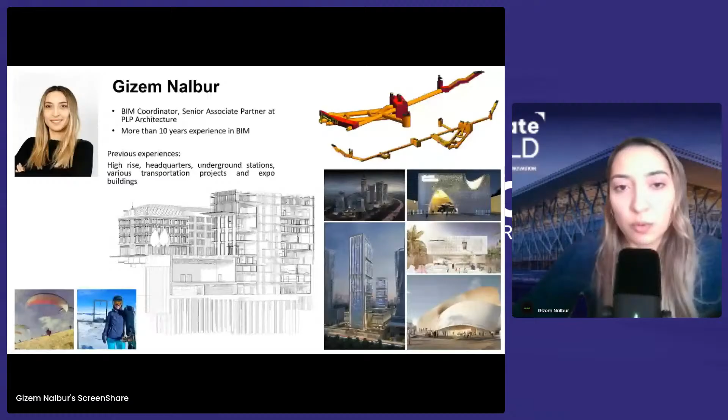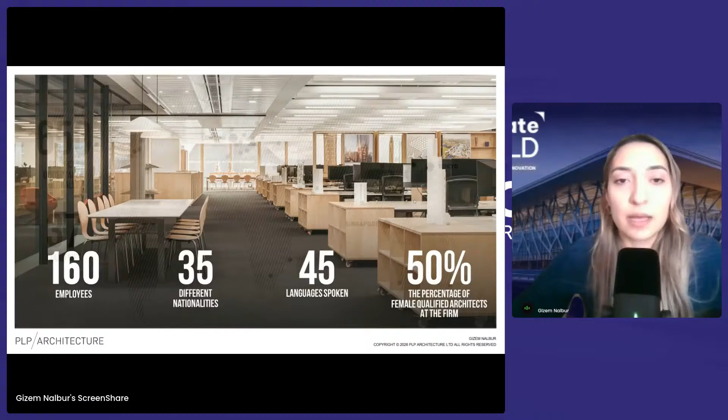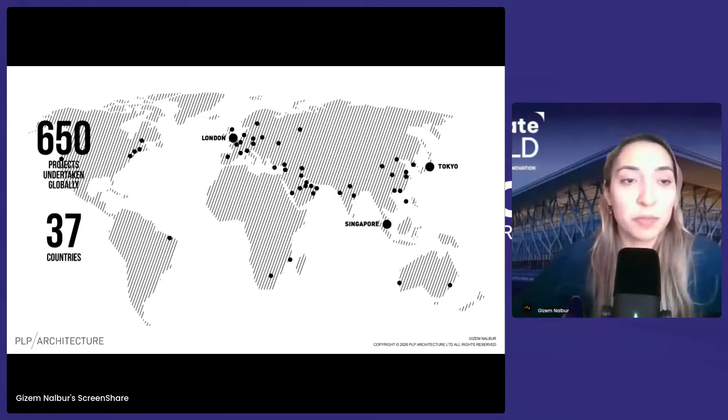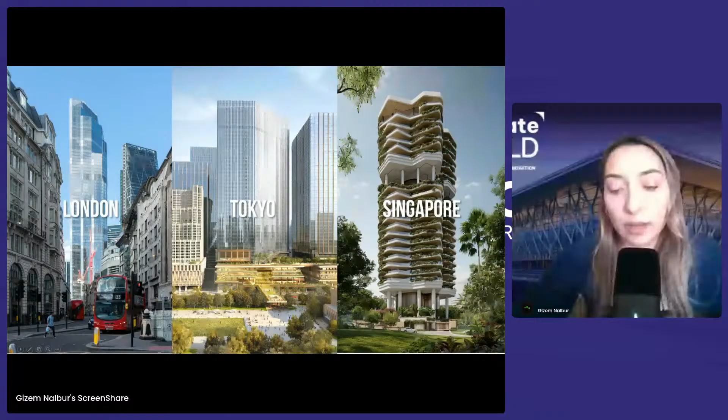So if we look at what we are doing in PLP and who we are, we have 160 employees and our main office is in London, but we also have two satellite offices, one in Tokyo and one in Singapore. You can see the projects we've had globally on the world map here. We've done about 650 projects globally, and as mentioned, we have three offices around the world. You can see 22 Bishopsgate, which I quite like, in the middle of central London, and some of the clients we work with here.

We are an architectural company, but we also have PLP Labs, which does research and strategy. As an architecture company, we do urban design, architecture, interior product design, and sustainability.

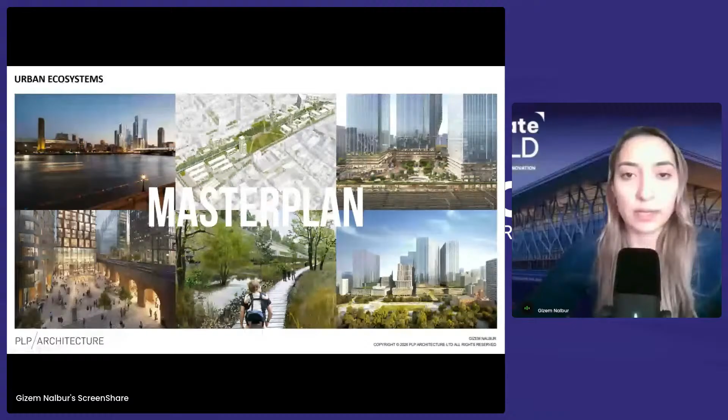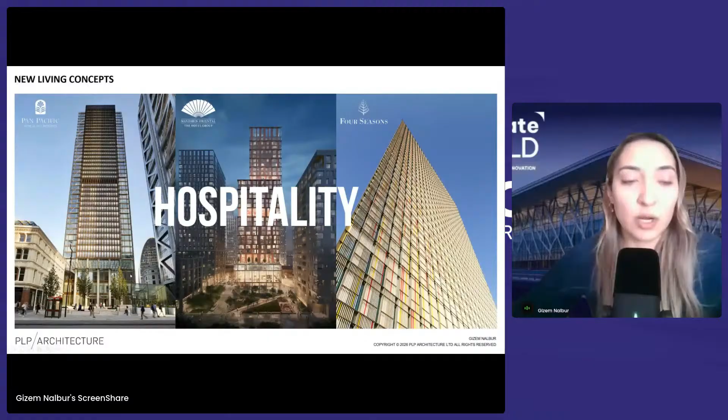We also do residential projects and hospitality. This is 150 Bishopsgate - again, I quite like this building, especially when you come out from Liverpool Street station in central London. I think it looks impressive, to be honest.

Again, some of the brands and clients we work with, and some of the restaurants we work with. We also care about sustainability a lot, and thanks to London Build magazine, we were the most sustainable design studio in 2024.

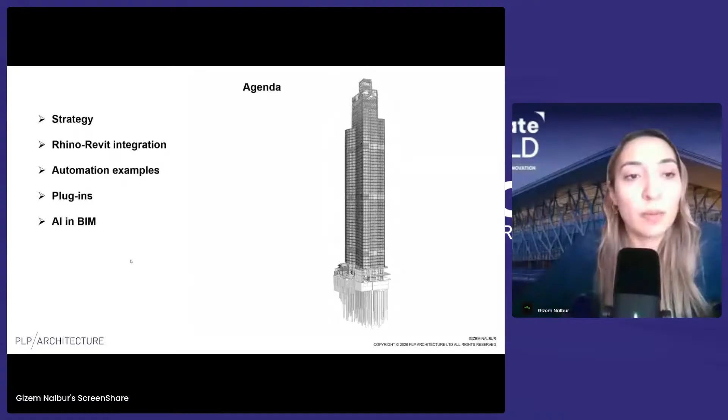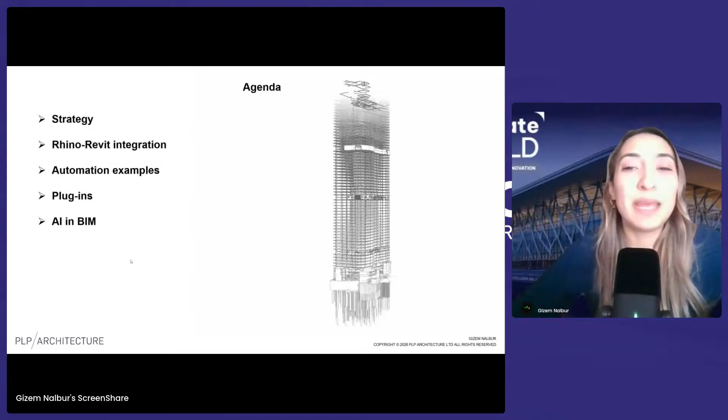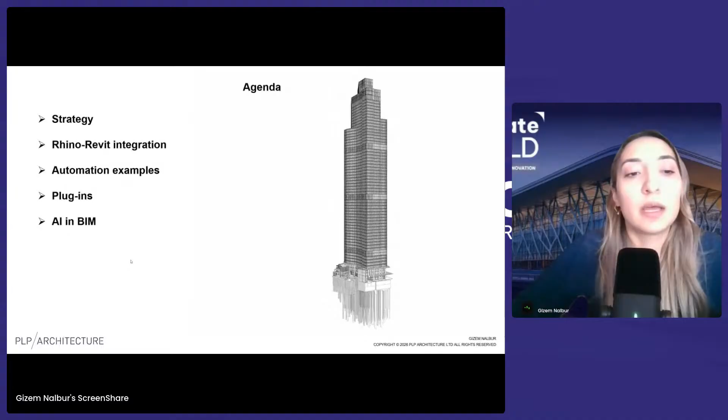So we talked about PLP, and diving into the presentation, let's look at the agenda. We'll talk about our general digital strategy in PLP, how we integrate Rhino and Revit, and look at some automation examples, and why automation is so important for us. We'll look at some plugins - the plugins we create in-house or third-party plugins we use, mainly for Revit. We'll also talk about AI in BIM - two or three important topics about AI and how we implement AI in BIM and technology at PLP. So let's start our presentation.

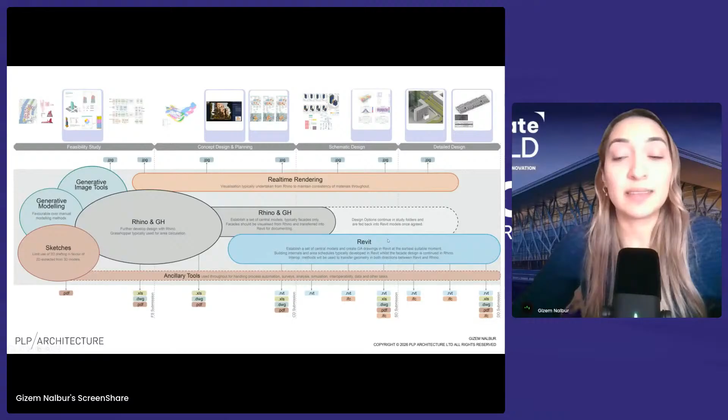At the end of the planning stage, in the schematic design stage, we still use some Rhino and Grasshopper, and sometimes we use them in the middle of the detailed design stage too. It depends on whether we need to create various facade options. You can create geometries a bit more freely in Rhino, and you can also create lots of parametric and generative models there. So sometimes we might need to continue using Rhino and Revit at the same time until the middle or maybe the end of detailed design.

So if you look at how we convert geometry from Rhino to Revit or Revit to Rhino, first let's start with Rhino to Revit. We use four different methods mainly, and the first one is very basic: you can export a DWG file from Rhino and link it into Revit. This can be 2D or 3D Rhino geometry, and this is very quick referencing.

You don't need to educate people about how to script, or spend time on it. Just export DWG and put it in, but there is no BIM data—just geometry, solids, or lines as 2D. But it depends what you need. This can also be very useful to define the facade boundaries when you start using Revit in the beginning.

The second method is a BEAM plugin, which is very useful for us—we quite like using this plugin. This converts Rhino geometry into Revit families. If you have blocks in Rhino, it converts them as families, so every block comes as one family. If you have 10 of the same blocks in Rhino, it places these as the same family into Revit, so you have one family and 10 instances in your Revit project, which is very good.

The other way, from Revit to Rhino, is basically the same thing: you can use CAD export, export as DWG and put it in Rhino, use the BEAM plugin, or create a script with Grasshopper. And this isn't only for converting geometry.

In our office, we also matched all the libraries for Revit and Rhino, so we have the same libraries in both Revit and Rhino formats, but these don't have exactly the same geometry, so we don't convert these from Revit to Rhino or Rhino to Revit.

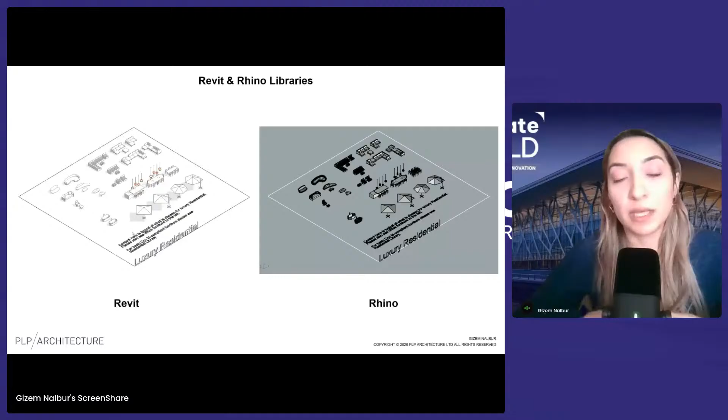We can do some things, but since we use Rhino more for taking renders and for visual and design purposes, we use more detailed furniture in there. But in Revit, we use more simplified, low polygon furniture, which looks better on the drawing. We create this generally from scratch. This is just one bit from our library—I'm not allowed to show everything about our workflow, but I wanted to give an example. You can see the same library in Rhino and the same library in Revit. Again, same principle: in Revit, things are low polygon and more useful for drawing purposes, while the other is more visual. We have the same libraries, but that's not our main aim.

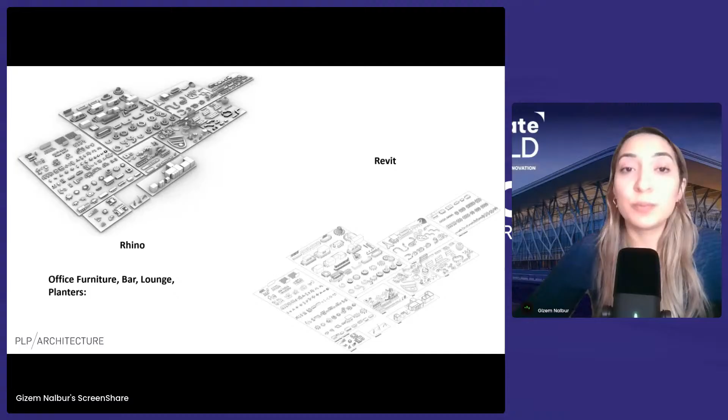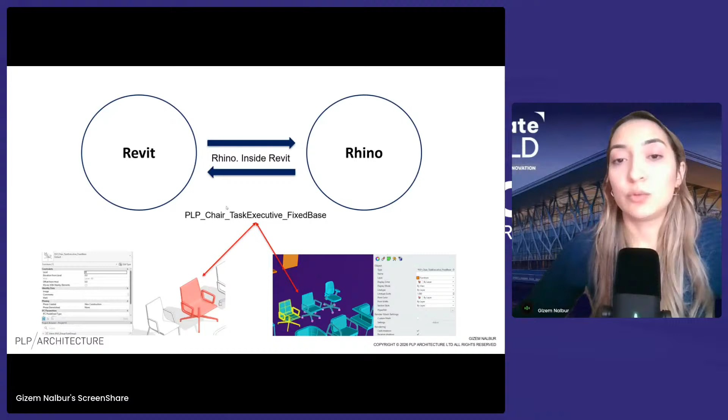Our aim is to swap these when we need to jump from Rhino to Revit or Revit to Rhino. So what we did was create these libraries but matched the family origin with the block origin in Rhino. This is a block in Rhino, and it shares the same origin with this one. This has more detail for visual purposes and has material, for example, while this one doesn't have that detail. They share the same name. So using the same origin and the same name, when we need to swap these elements from Revit to Rhino or Rhino to Revit, it's very easy for us because we already have scripts we created, and we use these scripts to convert each other.

We'll look at one example project about this now, which I quickly mentioned earlier while showing some general examples of our work. This is the Net Zero Korean National Meteorological Center in Korea. We won the competition with this design, and I quite like it actually. If you look here, it looks like a box in a box. Because this is a very sustainable building, we needed to create a secondary environment in here.

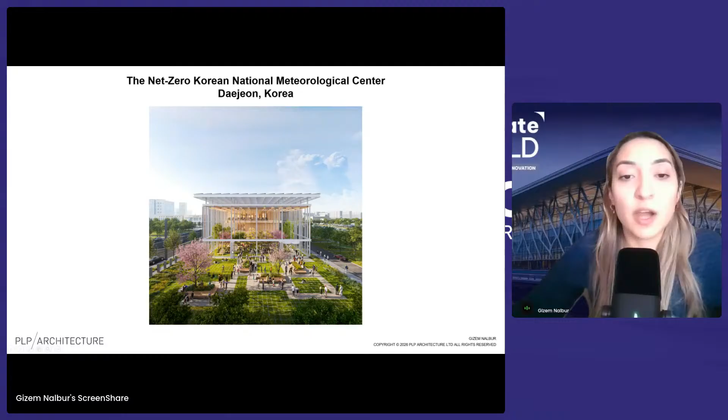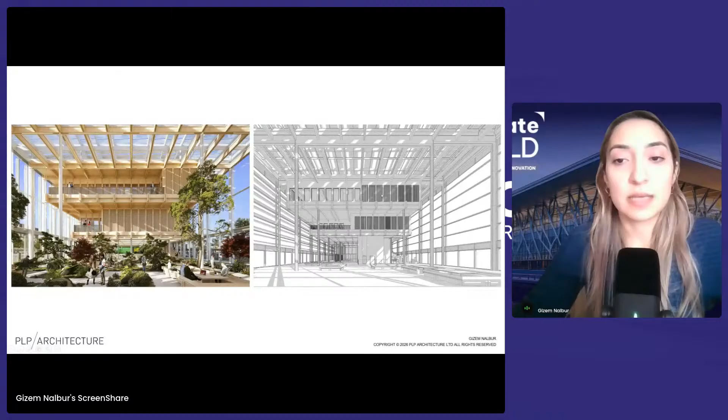Another render. What we did in this project—we started modeling with Rhino, and we did all the Rhino modeling for the competition design. After winning the competition and starting schematic design, we converted this geometry into Revit. So this is a render taken from Rhino, and this is how it looks in Revit. Of course, when we moved to schematic design, we needed to change and edit some bits, so there are some differences between them, but it's basically the same.

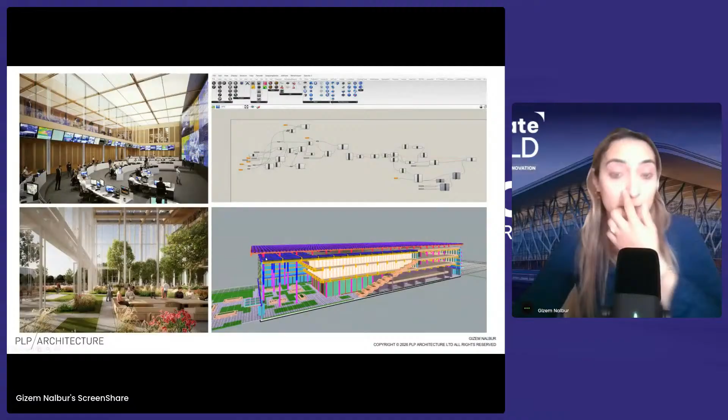So what did we do? This is the Rhino model, which you see on the bottom right. We mainly converted the roof, facade, and structure from Rhino to Revit, because we modeled these very precisely in Rhino, so why wouldn't we do that? We took the boundary for the curtain walls and created these curtain wall types in Revit. For the fins, we created fin families and then placed them using these positions. For the structural bits, we converted from here because it was CLT—we created some families and put these into Revit using Grasshopper scripts.

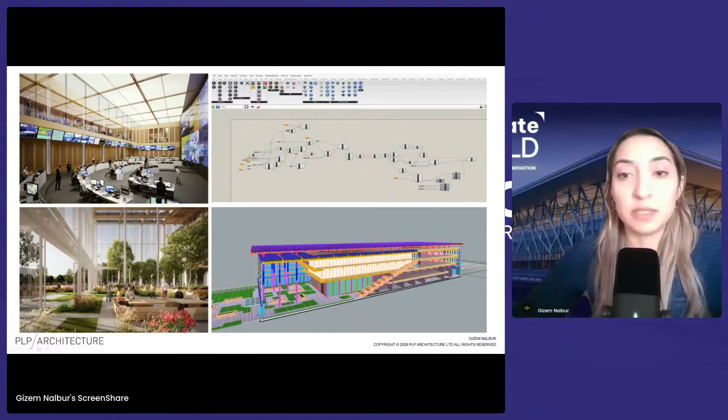So we mainly took the outer structure and structural bits in here. For these bits, for example the seating outside, these are very bespoke, so it's not like furniture from our library—we used a BIM plugin to convert these as a family into Revit. Then we worked on the internal layout in Revit in more detail, changing some bits and doing revisions. This is our Revit model, as you can see, with the bits I mentioned. We prepared all the drawings from Revit for this project.

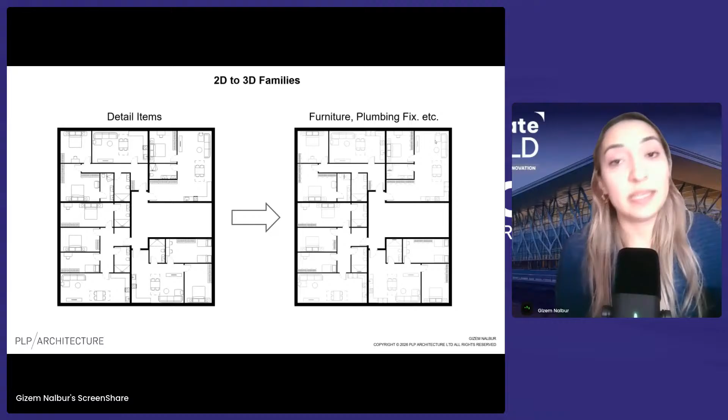So we're diving into different automation examples now. I think this is a bit similar to the other one, but it's totally about integration of 2D and 3D families into Revit. We sometimes design very huge buildings and lots of skyscrapers. In one project maybe we have 90 floors, in another we have 50 floors. If you put 3D furniture in Revit for design options across all the floors, it makes the model very heavy, even though we separate the fit-out models—it still becomes very heavy.

So we found a different solution, and we created detail item versions of these 3D elements. In the very early stage, like concept design and planning stage, we start working with these 2D detail items, and we can copy these and try different options.

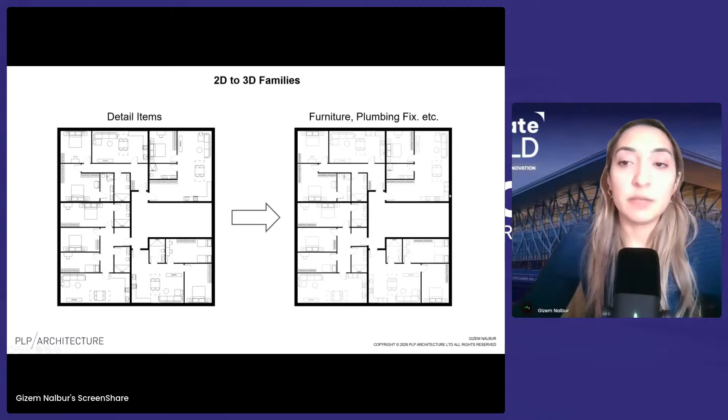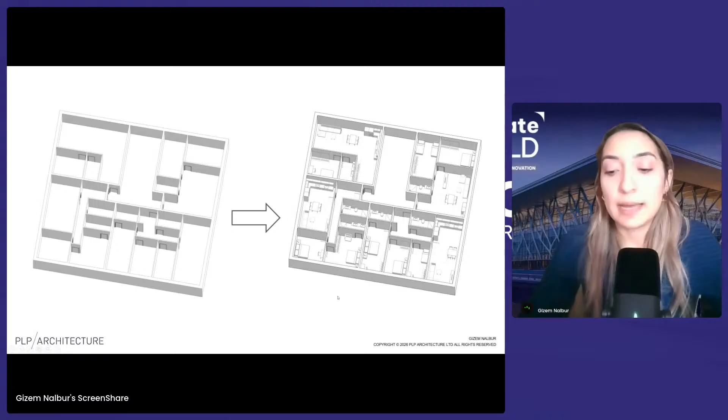When the client picks one of the 3 options we created, we use a Dynamo script to convert these to 3D objects. This is the detail item version. Since it's 2D per view, you won't see it in 3D, which keeps the model very light. Once we decide which option to continue with, we convert these to 3D and we're ready to go. If we do any revision, we can just continue working in 3D.

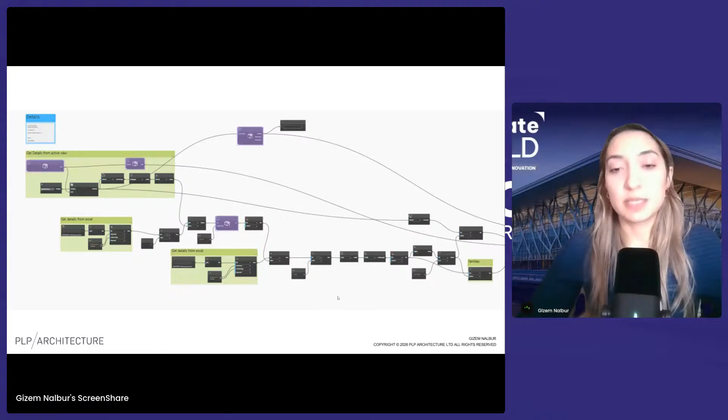This is the Dynamo script we created for this. Dynamo is a visual programming tool, similar to how Grasshopper is for Rhino, but Dynamo is for Revit. You can create scripts without doing actual coding, just using nodes, and if you know how to use these tools, you can manipulate models or any drawing in Revit easily using Dynamo.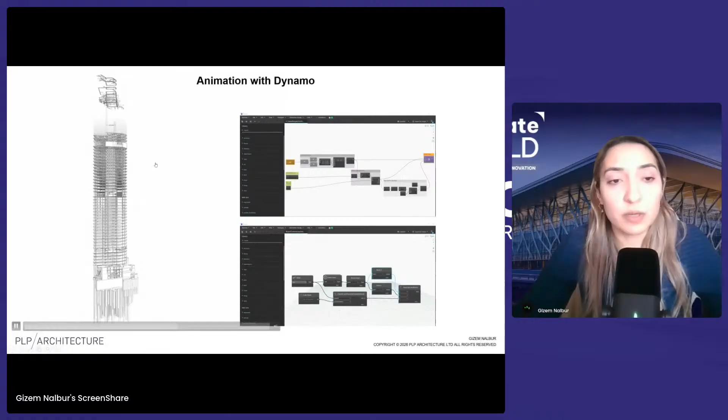We basically created lots of cameras around 360 degrees of the building, and we did this for 3 different models, all with scripts, so we didn't do anything manually. We wrote the script once in one day, and then we can use it for every project.

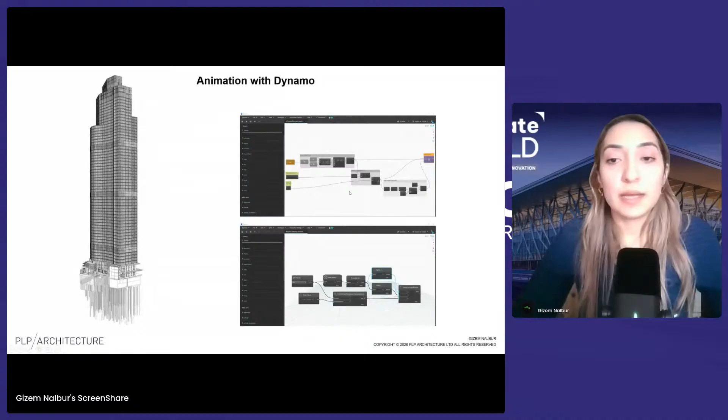We created lots of images to make this animation, and of course it takes so long to export these images from Revit. So we just run these while leaving the office, and it runs overnight. When we come to the office the next day, all the images are exported for one model, or if you run these from 3 different PCs, you have all of them at the end.

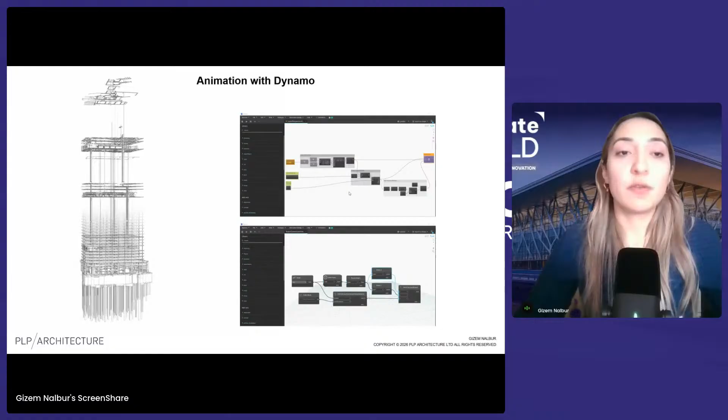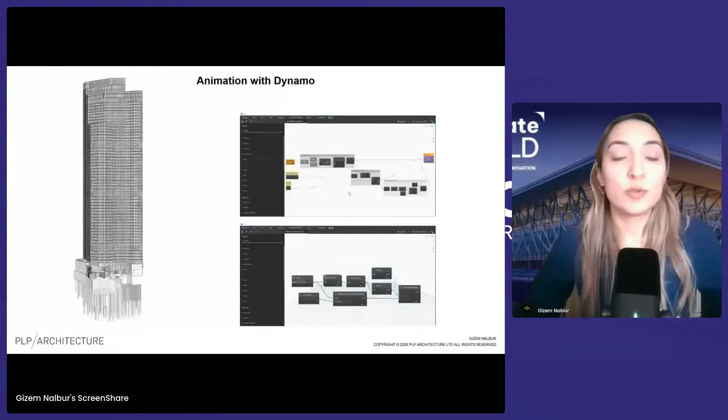Why I wanted to mention this is because clients really like to see these kinds of things. Yes, we have big models, we model everything in Revit, but it's really hard to understand for a person who doesn't know how to use that software or read these kinds of drawings or 3D views. If you animate these buildings like that, it will be much easier for your clients to read, and it will look better than just showing the Revit screen.

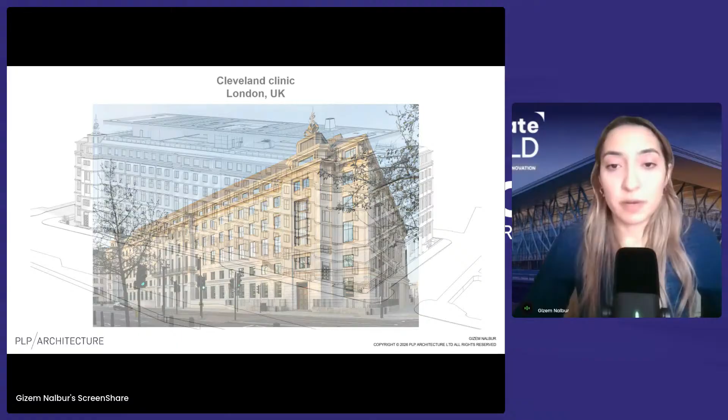Another example project, this is Cleveland Clinic in London. It's a very big building, I must say. While doing this project, we created lots of Dynamo scripts because sometimes we needed to do revisions for lots of bits. Since this is a clinic, we needed to create lots of different furniture and specific things, and for these kinds of big buildings, we really quite like doing automation.

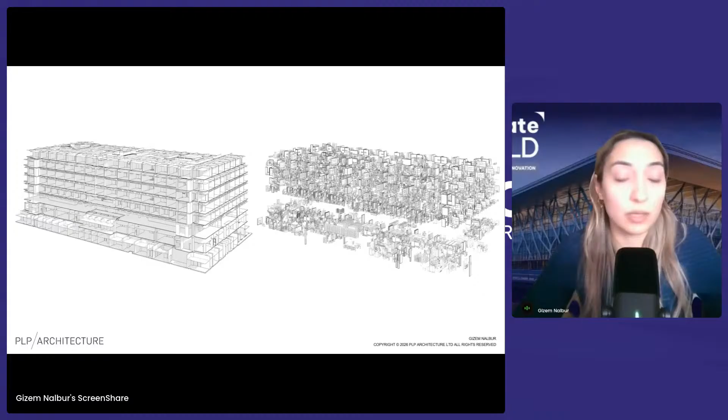What we are trying to do with automation is make architects' lives easier while working in Revit, because if you do everything manually, it can take so long to do some basic things in Revit.

I want to continue with another example of automation in our office. This is a fire strategy example. So what can we do? If you define the right fire ratings for the walls or doors in your project in Revit, we can script this, as we have here in Dynamo, and create these fire strategy drawings automatically with the color code you define.

This is very useful because if you have a very tall building, as I mentioned before, sometimes you think it's a skyscraper with lots of typical floors, but sometimes not, because clients ask for lots of different functions, like mixed use. Sometimes we do a skyscraper where some bits are retail, some are residential, some are hotel, and that makes all the plan views and layouts very different.

So then you need to create these strategy drawings for all the levels. If you use this kind of script, it creates all the drawings for you and makes your life much easier. We use these for every project. We have a Dynamo library in our office, and sometimes we just need to adapt or pick some different properties in the projects, but generally it's very easy to use.

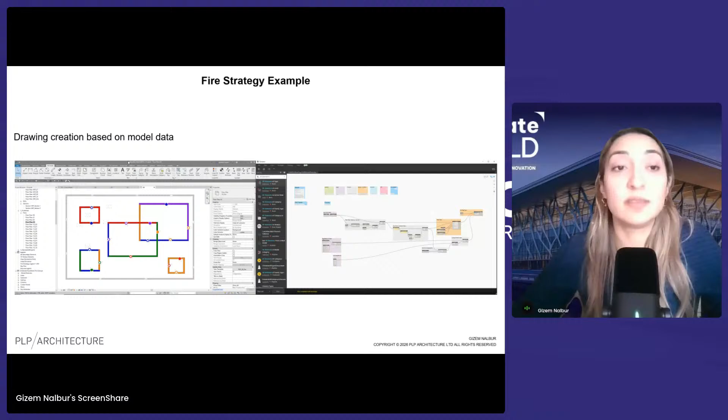But of course, this requires time to understand the requirements from the architects in your office. So another example is the plantation example - plantation is not very good in Revit in 3D, I must say. Sometimes some of you use landscape assets, but it looks good on the renders while it doesn't look good on the drawings, because it shows like a bubble only, with lots of vertex and points, etc. So what we do in 3D, we use very basic low polygon plants just to show in the diagrams, etc.

But we have a 2D plantation library in Revit, and we use these 2D families, detail items on our views and sheets. And we have some Dynamo scripts, and we can arrange the transparency, randomize colors and saturations and more.

So it looks much better and much more like a presentation style in the drawings. I quite like this one because you put tons of trees, and when you click a button, it makes it look much more different than before, and everyone is very impressed. But it is basically very easy to create a script in Dynamo, so it's very satisfying to do these kind of things.

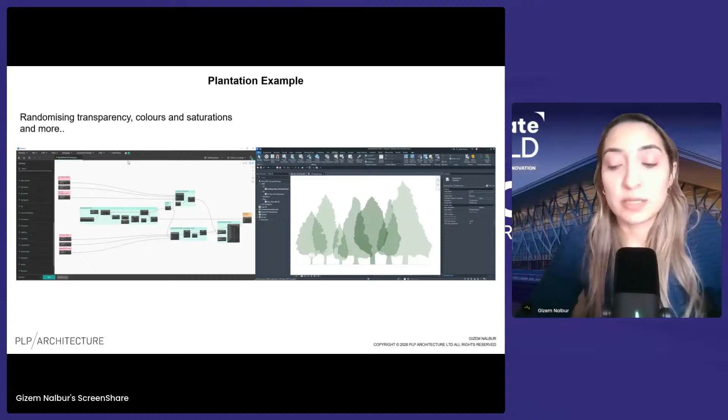We will look at another project example, which is WLA Artificial Intelligence Lab in Shanghai, China. While we are talking AI, I am also proud of that - we also designed an AI lab building, and I quite like this building too. And I really respect Chinese working style - they do everything very quickly, and they are very dedicated to work. So all the design and construction was completed in 3 years.

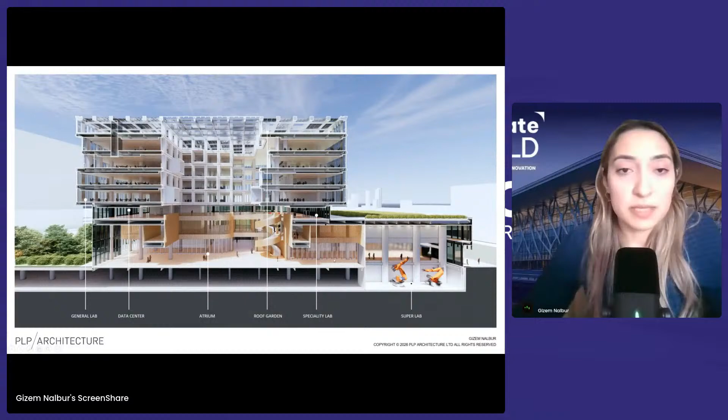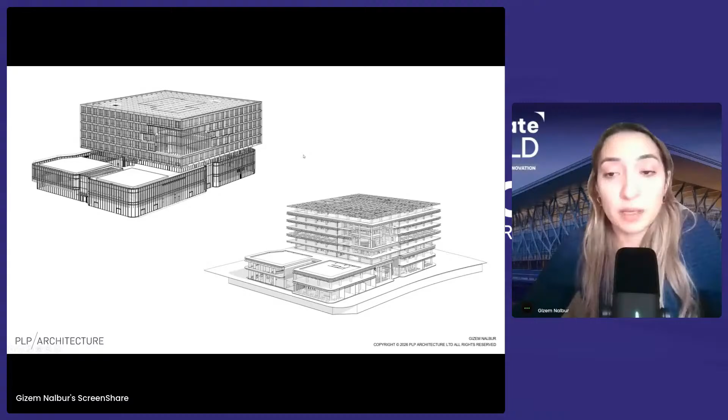And of course, we modeled everything in Revit again. We converted these roof bits and some of the facades by creating families and using some Grasshopper scripts from Rhino, and we modeled some of the bits manually. But again, for these kind of big projects, it is very useful to automate some manual and boring things.

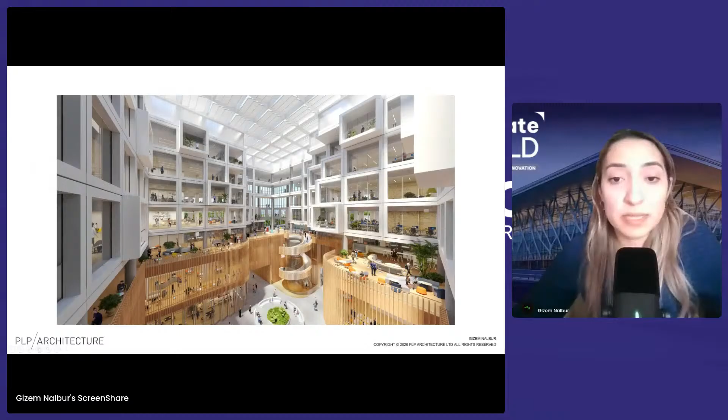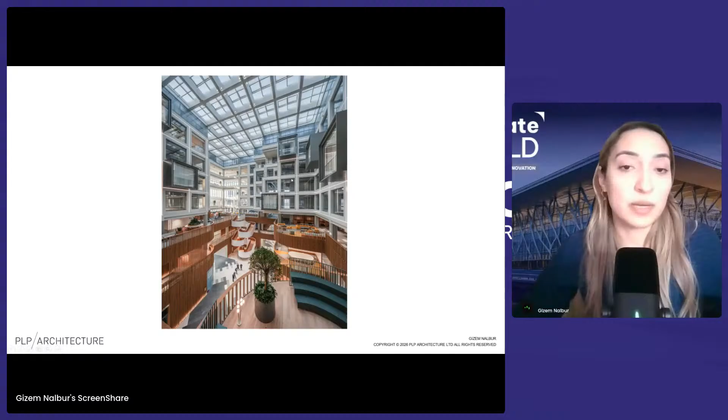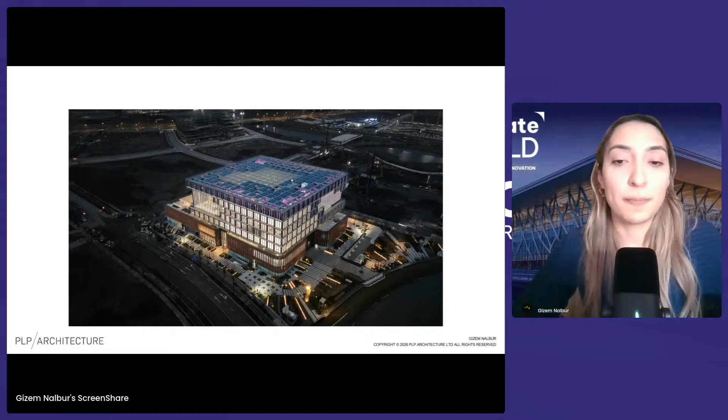And this is a render from inside that we created. And this is a real photo, which is currently like that. Of course, we had to do some revisions for the stairs, etc. But I'm really impressed about the construction system in China, I must say that. And this is a real photo from the night, and we enhanced the saturation and the lights, by the way.

So we will continue with the plugins that we use. Again, we quite like automation - I think you must have understood from the presentation so far. I'm personally very into automation, and we also use Python, and we created our own PLP plugin, which you can create with PyRevit easily by watching some tutorials, by the way.

But we quite like creating some complex things. I cannot show everything in here to you, but I selected some of them, and I had to crop these a bit to show you.

So we have a model issue tool - I think it is very useful. While we are sending our models to the consultants or clients, we don't want to send our models with lots of work in progress and messy views. And we don't want to delete these views and schedules manually.

So we also want to clean some things, like if we have any linked CAD file, or if we have lots of unused view templates, etc. So with this button, basically our architects, project architects, just come here and select which model they want to issue and select where they want to save this file, and the script does everything for them.

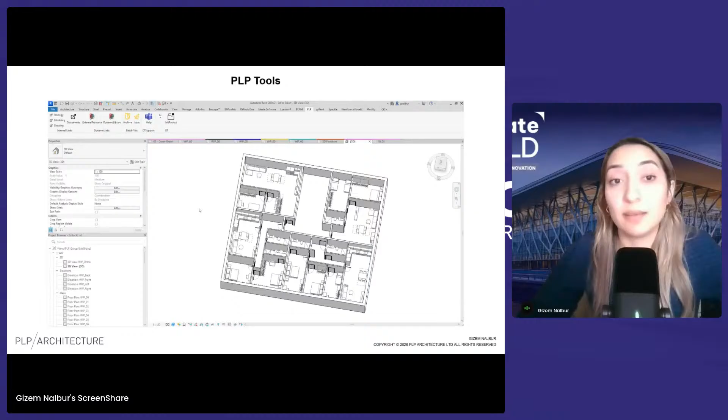So I quite like using these kind of tools and creating these also. So this is not only for Revit - we also have PLP tools for Rhino.

Again, we create these with Python scripts. Like if we want to import layer or change some of the layers for the block objects, or copy layer name, hide, isolate, lots of other things, we have some commands for that.

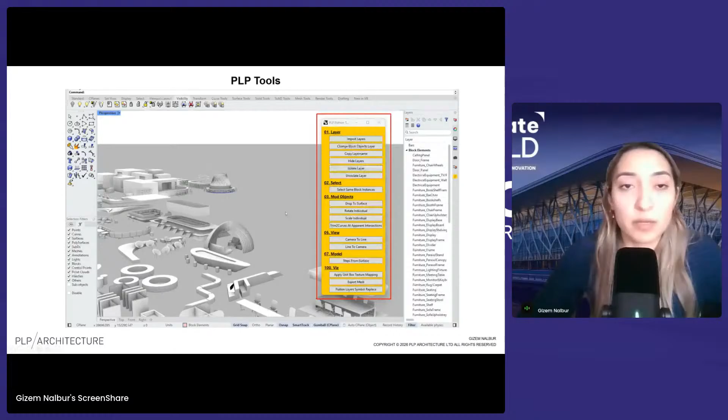I quite like this one, drop to surface. Sometimes the elements, objects are floating around in Rhino, and you just want to align them and stick some of the elements on one of the surfaces. You just need to select the surface and the elements, and it will drop them with this. So I really like these tools too.

So let's look at the other things. Of course, we create some plugins, but sometimes third-party plugins are more reliable because they also give you customer service, and you don't have to handle all the issues that you come across on the way, and you don't have to spend lots of time with scripting, etc. Because of that, we use some third-party plugins too.

Let's look at them. First one is Ideate software and apps, and Ideate Automation. I quite like using these, and I will mention a bit more. And Rhino.Inside, I already mentioned how we use it, when we use it, and BIM again. And PyRevit, we use in Revit and also to create our Revit commands using Python.

And Revit Lookup, I quite like it actually. If you are playing with the Revit API, you need access to some libraries. This is very good - you can select the object in Revit, and if you go to Lookup, it will tell you where to find it with the Revit API.

And interactive Python shell, I will mention this in the AI bit a bit more. I quite like using this too while testing something, especially with Python scripts. And the DiRootsOne ProSheets - most of you probably already know that to export PDFs and DWGs, it is useful. So I would like to look at the Ideate software a bit.

So I can talk about Ideate automation, Ideate software a lot, but I want to keep it short. Ideate automation is another plugin, but it's standalone, and you can create tasks in here and schedule them overnight. There are model health checks, and you can change these properties, whatever you want to see.

So what we do is schedule these tasks overnight, and instead of opening and checking every model manually, we run these at night, because when scheduled it can open the Revit model, check, and close for you. Then the next day we just check these reports instead of opening the models, and if we see we need to open one and check something, then we open it, since we're doing lots of different projects and otherwise it can take so long.

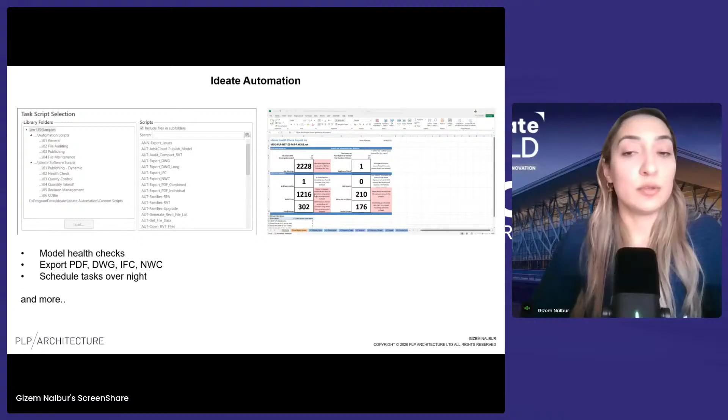Or you can export PDF, DWG, IFC, NWC overnight, and the next day you can come check how it looks on the PDF. So we will start the AI bit now.

What we do about AI in PLP and what I search personally. But at this point, we should share a poll for you, and I'd like to learn which large language model you're using more. We'll look at the results at the end.

So with AI, we'll start looking at vibe coding. What is vibe coding? Vibe coding is basically you define what you want, and you're not a developer, so you don't need to know everything about coding. AI creates the code for you, and then you need to iterate or refine if needed.

And how I use this, you can also use this with any type of coding like Java, C#, etc, but I like using Python. I'm not a Python expert, but I know the basics of Python. I know how to connect, and I know how to reach the classes, etc. So I use vibe coding for Python scripting.

So I did the same thing with ChatGPT, and this is very basic, what I asked. Again, latest version and thinking mode, same prompt, and it thought for almost 3 minutes, and after that it worked again.

So I'm going to Copilot, paid version, think deeper, same things. It gave a fast answer, less than a minute, but it didn't work. I can't see any dimensions in here. And Gemini, paid version, Pro, and thinking mode, fast answer, less than a minute, but again it didn't work.

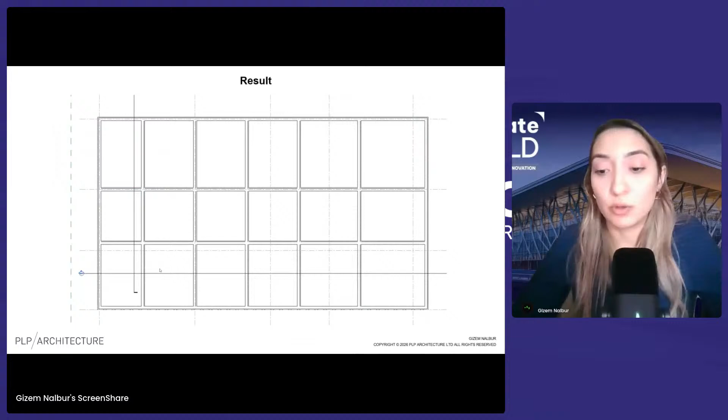So at this point, what I decided, I have to remove Copilot and Gemini from my case study at the moment, so I can continue with Claude and ChatGPT, because for these kind of very basic things, they didn't work, and ChatGPT and Claude worked.

And the prompt in here, I changed it. What I want to do, I want to put dimensions in between grids and walls vertically, and I also want to place rooms automatically on all active views, not only one view.

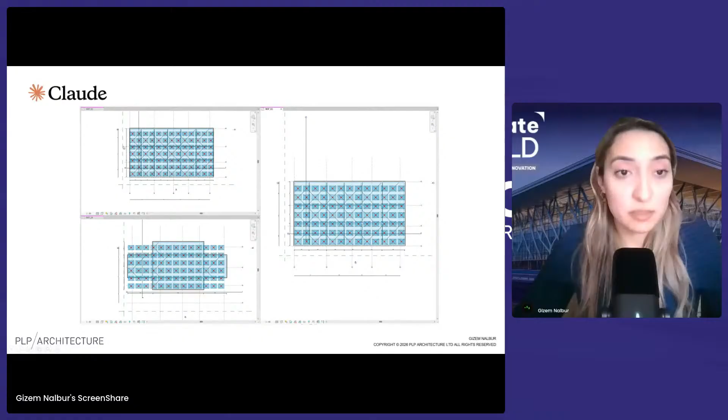And when I do that with Claude, as you can see in here, it put lots of rooms everywhere. Like the dimensions okay, but the rooms are not okay, and on every view. But I iterated, and then faster answers every time, and after 4 revisions, it works perfectly.

ChatGPT, again, first script 4 minutes, and it didn't work, but with 2 revisions, it worked. So personally, I should say that I like working with Claude more than the others. ChatGPT also works, but Claude gives very easy and quick answers, and also it shows the structures well. So for the coding things, I like using Claude.

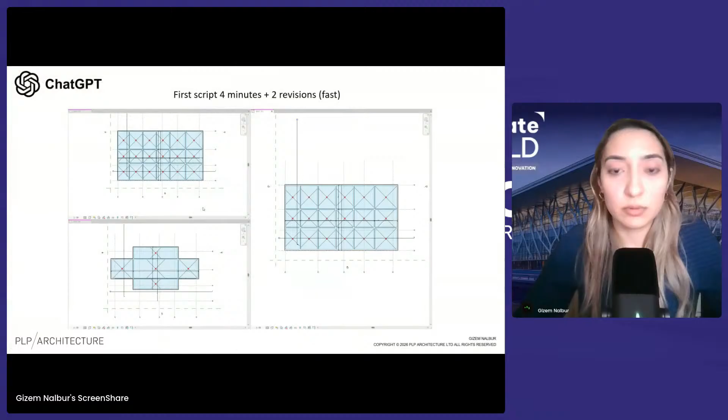So I continue with Claude, and I just want to show you another thing in here. What am I doing? I want to attach the walls to level above with 0 offset. And you will see I asked this, and then it didn't work at the first.

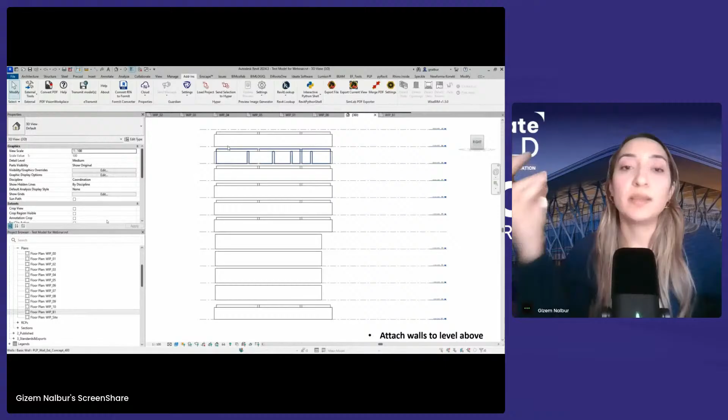So generally in this kind of things, it depends where you will put the Python script. You can put the Python script into Dynamo. You can put the Python script and connect as a plugin and commands with PyRevit. And one more thing that I will mention, but I am just showing in here, the walls are connected to the same level and they have top offset, which I want to change. And the third thing, you can use the interactive Python shell.

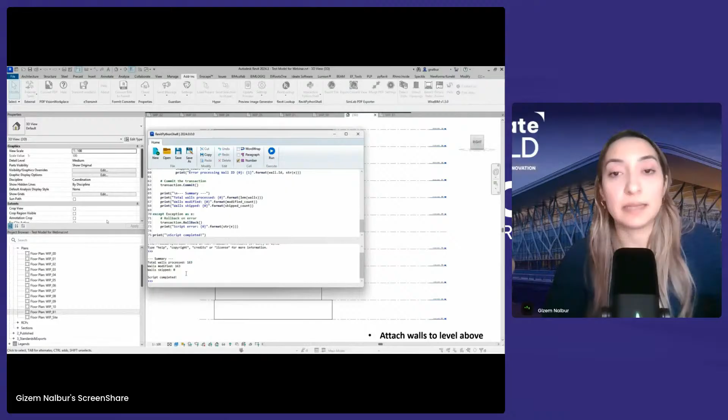I find this very useful because you can just copy and paste the Python script in here, and if it works, you can see the result immediately. But sometimes I also use VS Code to try this. So I connect VS Code with PyRevit, and then I try with that.

But when you select it, it just did everything. Like it arranged the top level at the level above, and all the top offsets are 0.

So if I continue, another one, I'm taking this one again, which is the one I have just done. And let me just check actually. Maybe I just need to, yeah, this one, sorry. So we need to attach the walls to the level above, but also what I want to do is create model groups for facades and internals per level.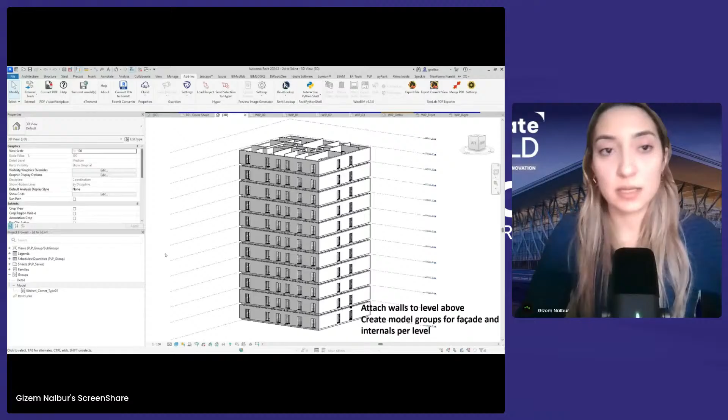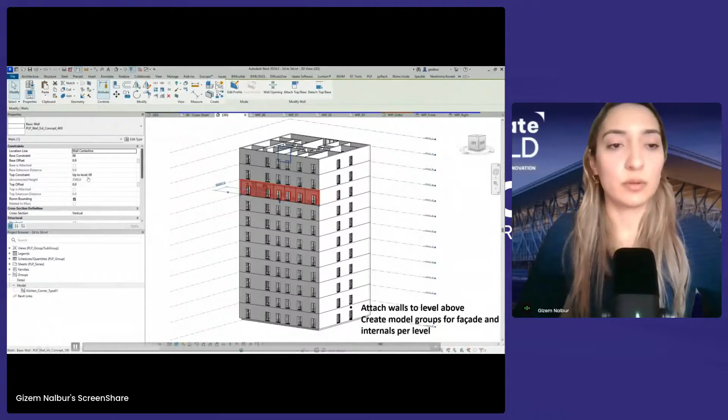So I just want to move a bit fast. So I checked the walls and then they weren't correct, or they weren't like what I want. And as you can see in here, it arranged all the properties of the walls. And now the base constraint is level 10, top constraint is level 11, or the others for level above, and the top offset is 0.

I also want to make these as a group. And how will I define this? So it will look at the properties of the walls. If the wall is exterior wall, it will take these as facade group. And if the wall function is interior, then it will take these as internals, and it will make group per level.

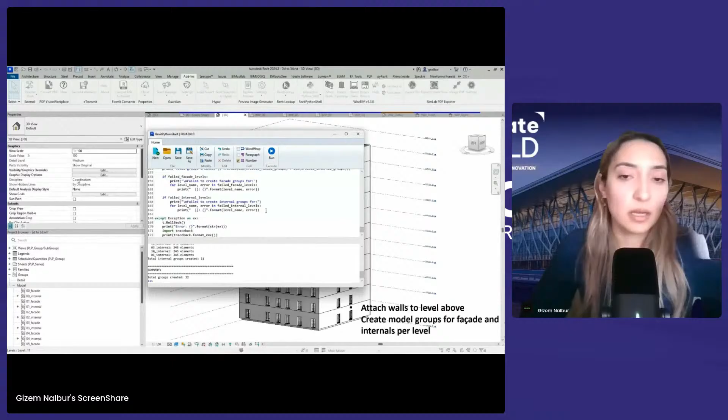Of course, again, it didn't work the same first time, because although you say that I will paste into interactive Python shell, sometimes it doesn't understand, and it creates to use in Dynamo, or it creates to use with like VS Code or Revit. So then you just need to say that again, and then it works. And as you can see in here, it did, and it created 22 groups in here.

So I just wanted to show these with a very ugly model that I created by myself, instead of using a huge model, because it takes time to process these scripts. But I tried with our complex model, and it also worked, by the way.

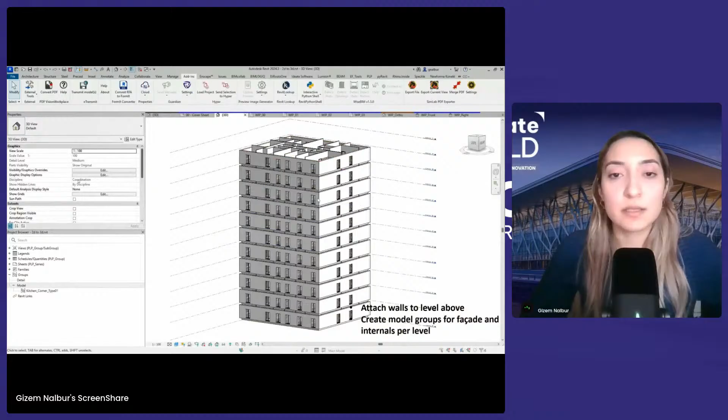So to be able to use vibe coding, you should have basic knowledge about the language you want to use. Like I use Python, and I have at least basic knowledge, and I can create some Python scripts by myself, but I prefer doing vibe coding, and I prefer connecting these bits by myself and creating the thing.

So next topic, AI chatbot. We also created an AI chatbot in our company for our architects, which we call ChatPLP. This is not like ChatGPT - it is only for work topics, and all data comes from our guidance documents and reliable sources picked by our digital design team. So whatever you ask, we have lots of documentation and guidance for the software that everyone can access from our internal intranet. We gave this to the AI chatbot that we created, and it takes the answers from there and tells you what to do.

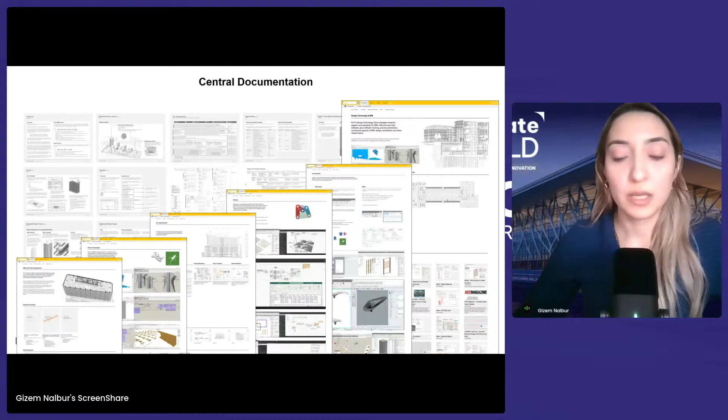Since the answers are coming from our internal documents, if you ask which document should I look for this, it tells you which document to look at. So our staff can go to our intranet and check which document this information comes from, and they can see these things in more detail because we also create these guidance documents using image screenshots, etc.

Another topic is model context protocol. I won't go into much detail about this because I think James did a very good job yesterday - if you didn't watch, please look it up. He showed very good things, but I would like to indicate briefly what this is. Model context protocol is basically what I'm doing with vibe coding, but inside Revit, connecting these LLMs. You can connect Claude or ChatGPT in there - I think Claude works better, and personally I like Claude more for these kinds of things. You type these things to Claude from inside Revit, or you can connect Blender, Rhino, and other things too, and it helps you in there.

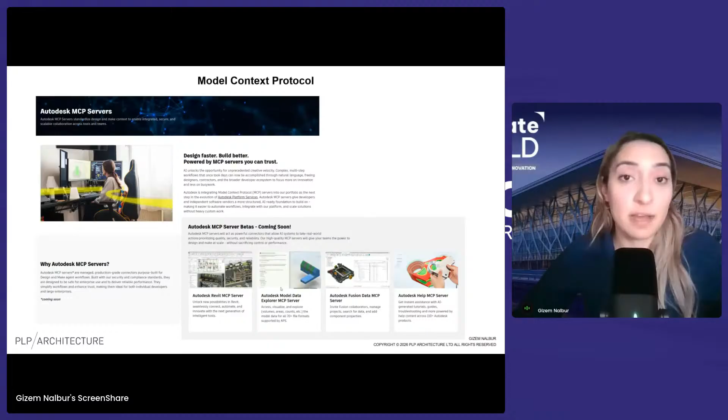When I started doing vibe coding, it wasn't that good, by the way, and it was frustrating, so I stopped using it for a while. After 2 months I came back and it was better. In total, I started doing this 6 months ago, and after 6 months it improved a lot. So we really don't know which tools we will use 6 months later, or 3 months later, or where it will go, but it is going very fast and very well.